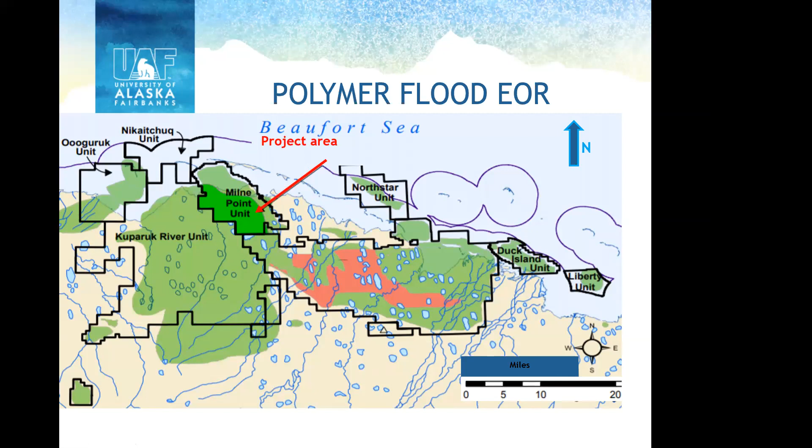I wanted to just get a little bit into the polymer flood project. This is a $10+ million project that we're working on with primarily Hilcorp, and it's funded by the Department of Energy. The location of it is the Milne Point unit, which is about 30 miles to the northwest of Prudhoe Bay. It was a 50-50 split between Hilcorp and BP, and now, of course, it's all Hilcorp owned. And they have been fabulous partners to work with.

I'll get a little bit into the polymer itself in just a second, but basically how this works is the polymer is manufactured in the Gulf Coast area of the United States as a powder. It's shipped up to Alaska, as you might guess, at great expense. It is then mixed with water until you get a certain viscosity, and then it's injected into the injection wells. There's not a lot of infrastructure to make it work and to make it happen.

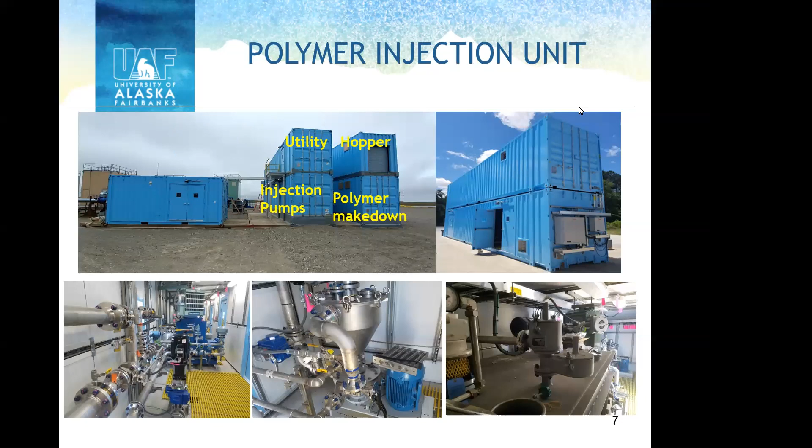So for those of you that really aren't familiar with oil field operations, you have an injection well, and then some distance away you have a production well where the oil and fluids come out. In the injection wells, you're usually placing a gas, a miscible injectant, water, and you're pushing that oil away from the injection well and towards the production well. Typically, since we can only use non-thermal means on the North Slope, we use a lot of water up there.

And again, going back to your pancake syrup, when you have that plate, especially with a little kid with lots of pancake syrup left over, and you run water across that plate in your sink, you see those little channels of water, those little fingers of water that get through, they break through those areas, and then maybe another finger breaks through someplace else. And then over time, it comes back and gets all that viscous product from between them.

So you can imagine in an oil field operation, if you're putting this water under a lot of pressure in there and you get a finger that pokes all the way through to the production well, you're getting an awful lot of produced water relative to the amount of oil that you're getting.

So with the polymer flood, that kind of takes away this fingering attribute, and it's more like putting a snow blade on the front of that water blade. So now it's just a whole lot more efficient at pushing the oil towards the production well. So that's one of the reasons that you would use polymer.

Nobody's ever used this before in a heavy oil production, with a few exceptions, I think in Russia and maybe in Canada.

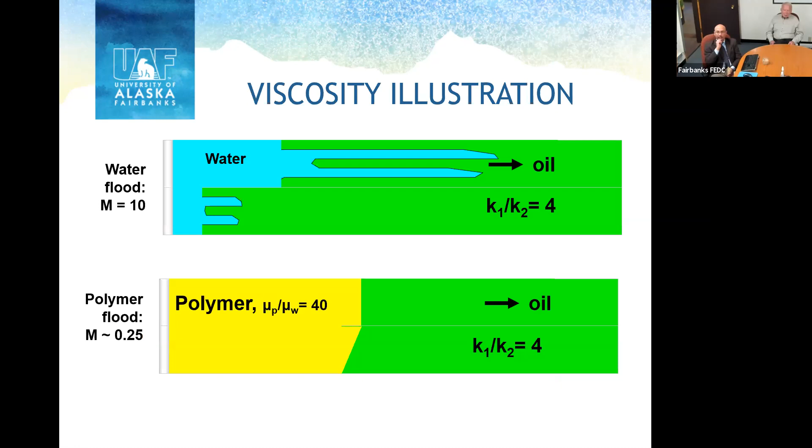You can't use the hot water or steam because your injection well is going through 3,000 feet of permafrost. And permafrost doesn't have any mechanical strength in and of itself. And if you start to melt it, it turns into like tapioca pudding. And the well essentially separates from the surrounding permafrost.

And the weight, you can imagine a 3,000 foot vertical straw, the bottom part of that well can't support the weight, and you end up getting that well buckled. It kind of turns into a spring, if you will. There's a deviation, and it just couldn't handle the weight.

The other thing that you could do is, of course, you can insulate around the hot water or steam injection well, but eventually that insulation is going to come to equilibrium with its surroundings. So you're still going to, after X number of years, start to melt the permafrost that's around the well. So insulation isn't going to work.

So that leaves you with some sort of an active cooling mechanism. You'd have a well pumping hot water or steam down, and then you'd have an outside water jacket or a glycol jacket that's for cooling. But you can imagine the amount of energy that that's going to take on the North Slope to have an outside water jacket circulating a cooling fluid through there.

So you're burning a lot of natural gas or using a lot of energy to generate the hot water and the steam, and you're using probably that much or more energy to create that cooling jacket, and then you've got all the pumps and everything that you're running with it. So that's why typically it's just not thought to be a wise idea or even economical to be using hot water.

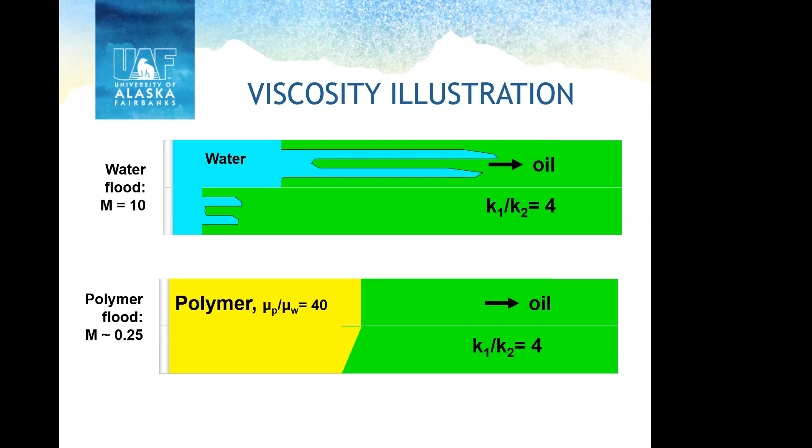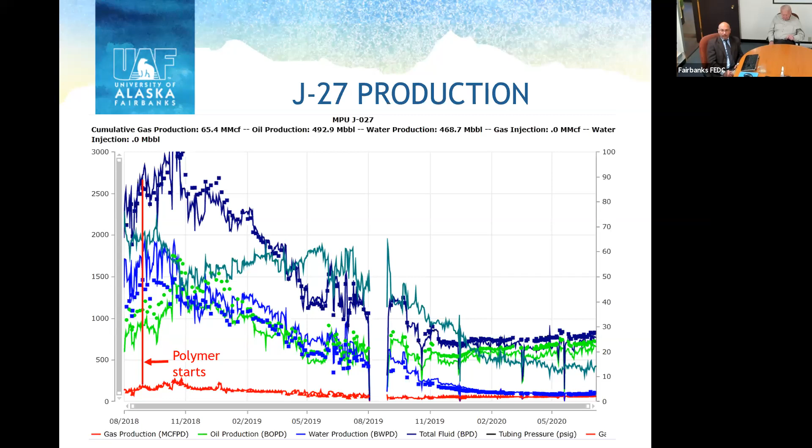Okay. I do have one last question regarding the polymer, and that is, what is the downside, or have we identified any, if the polymer cannot be recovered later? Well, this is the first time polymer has been used in viscous oils. Polymer is widely used in light oils. So we have every confidence that we'll be able to recover it. It's really the test that we're having is what solvents do we need to work on this specific water chemistry that we have.

And then there's just a few other minor things that you got to tweak in the field. For example, if you have to heat the water beyond a certain temperature, I want to say it's like 160 degrees, that polymer will start coating the walls of your heat exchanger, turns it into like a little Teflon pan. So then you start getting that insulation on your heat exchanger, and it becomes less efficient. So those are the sorts of things that we're fine tuning and playing with right now. Okay. Yep.

So this is another North Slope project, carbon capture and utilization for EOR. This one was even started by BP a long time ago. They said, you know, Brent, when we get permission to build the gas pipeline, that tells you how long ago this was, we're going to have to separate out the CO2 from that natural gas. And the general thinking in the oil fields is you put that CO2 down into the oil reservoir. It is an amazing injectant for additional incremental oil production.

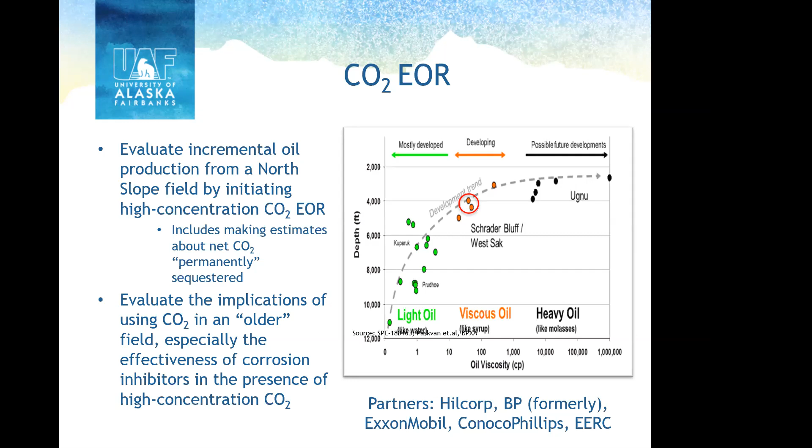And this is really right now at this point an academic study because there is no natural gas sales to the lower 48 at this time. So we don't have the types and the quantities of CO2 that we're talking about to get there. But what we're doing is we're laying the groundwork. We're creating publicly accessible data about what the effect of CO2 usage on the North Slope is going to be.

I think everybody agrees it's a good idea because when you use CO2 for EOR, a good chunk of that CO2 remains behind in the reservoir permanently sequestered. So we're trying to get our arms around, well, how much CO2 is continuing to circulate, how much CO2 is left behind, what are the effects on the fields, what's it going to cost, what's the upside potential, what's the downside risk. Those are the sorts of things that we're looking at.

And we're just, as I said, trying to create a public record. It's an academic exercise of modeling, working very closely with the industry, and we'll see where that path takes us. We'll be doing that for the next 2 or 3 years, funding a number of grad students. And we're working, as I said, very closely with the EERC on that.

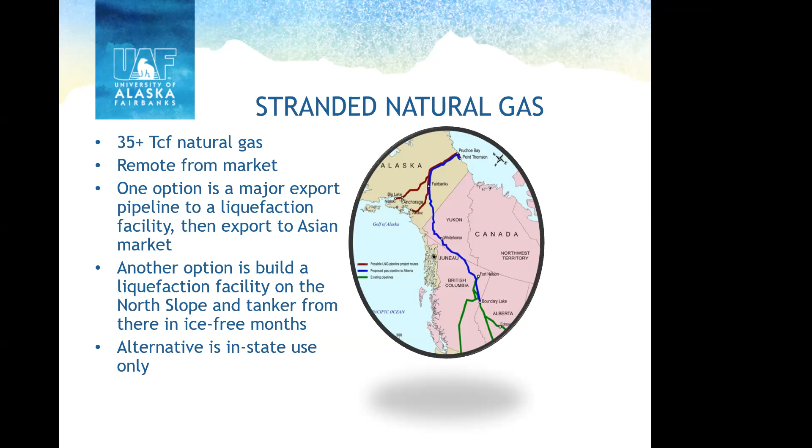Jim will correct me if I don't speak for him as well. But kind of giddy that you're actually looking at this. You know, we looked at a coal, excuse me, biomass to liquids project some years ago. It was going to make, as you would expect, high quantities of pharmaceutical grade CO2, and we wanted to possibly use that on the North Slope, or have it looked at. So we're glad that that's moving forward.

Mm-hmm. Yeah. So he hasn't yelled at me, so I guess I did speak for him.

Let's see. What kind of acids are formed from CO2? I think carbonic acid is one. Is that correct? I mean, that's soda pop.

Yeah, well, yeah, that's the primary one. Again, I don't have my speaker notes up. I don't know what happened to them on the screen. I had a few of those derivatives of what happens when you mix those together. I don't feel comfortable saying from memory because I'm just not technical in that area. So, it's okay, I could take some guesses, but I'd be wrong. And since this is recorded and on YouTube, I got to be careful.

What was Jim going to say? Nothing. He's just throwing me dirty looks.

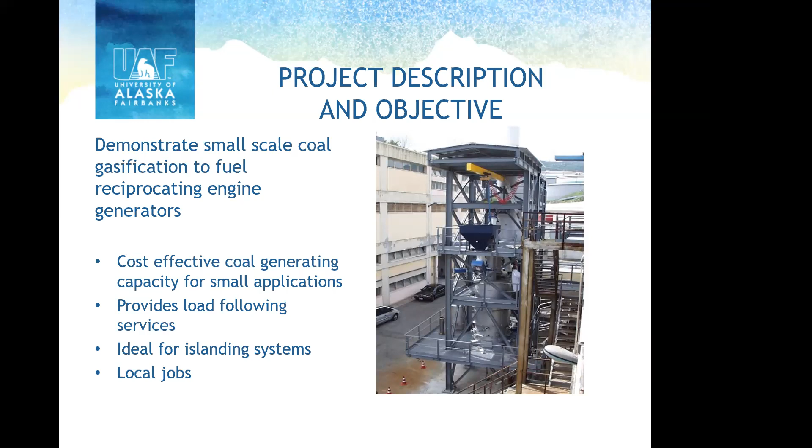Ideal for islanding systems, meaning that we could put it on the military base, for example, and if the Golden Valley grid ever went down or the base had to be separated for some reason, it could still operate. And then it's just good for local jobs. Here's kind of a listing of the equipment. This is what a gasifier looks like. This is a prototype that was designed by HMI and built at the Sotacarbo labs in Italy. Sotacarbo is partnered with us on our project so we can glean all their information from operating that gasifier.

It makes a low BTU syngas, and that low BTU syngas goes into an engine that's designed for low BTU gases, the Jenbacher engine, which was formerly owned by GE. A company called INNIO just bought it here within the last year. You would typically find these Jenbacher machines on landfills where they burn landfill gas. There's like 2 or 3 of them down in Anchorage, as a matter of fact. And there are distributors and support networks here in Alaska. We're very familiar with the Jenbacher.

The other component is that this gasifier makes tars and oils, liquids, if you will. And our plan is to blend those tars and oil liquids with ultra-low sulfur diesel or equivalent, and then burn in a diesel engine. This was the university's Pielstick 9.5 megawatt engine, but about 2 weeks ago we decided to not use the university's engine, and we're going to put a Wärtsilä in there instead. I'll have to update my spreadsheets.

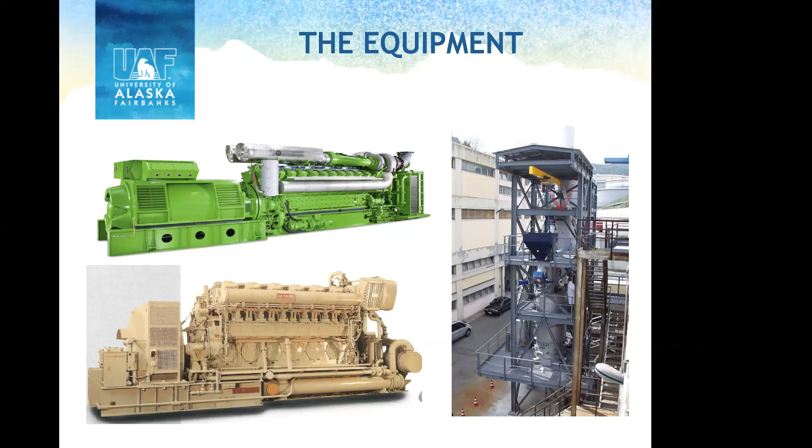So this is just kind of a little bit of a walkthrough so that you can better visualize what we're trying to do. So coal goes into the gasifier, a synthetic gas comes out and it gets cleaned up in a cyclone. Then it goes through a cooler, because if you send the hot gases into our ESP, electrostatic precipitator, you burn it up. So it goes through a cooling phase.

Then that syngas goes through the wet electrostatic precipitator, and that's essentially where all the tars and oils mixed with some water drop out. And we're working with companies right now to separate the tars and oils from that water and to clean up the water for reuse. Our plan is actually to use it as irrigation for 10 acres of greenhouses.

Then that gas gets cleaned up to take out any of the other remaining nasties, including all the sulfurs, and it goes into the Jenbacher engines where it makes electricity and heat. What I didn't put on this chart is then you have a stream here, blends with the diesel, and goes to the diesel generators. Our hope is that Golden Valley will work with us and use the diesel generators for their wind regulation.

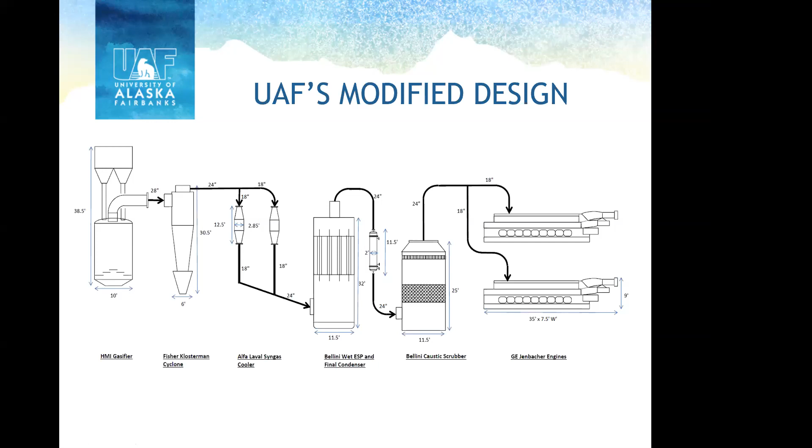So the DOE goals are that they want small units, and what I laugh at is they define small as 50 to 350 megawatts. Our project is 18 megawatts, and we actually have 3 different options. That's the largest of our options. Ultimately, we want to modularize this system. We want to get it up. We want to develop the technology. We want to prove it.

Then we want to be able to put it on skids, build them in some central manufactured area, ship them out to villages where they might be able to use them with the existing diesel infrastructure that's there, ship them to third world countries where they might need more reliable power, or even ship them to the lower 48 for a few applications there.

We're building this in a serious non-attainment area for PM 2.5, and even with throwing all the bells and emission controls, everything at it, in our market, it still should be economical. Our models are all showing that even meeting all the stringent PM 2.5, we can generate electricity for about 10 cents a kilowatt hour, which is expensive for the lower 48, but for up here, that's a pretty good price.

Of course, we're going to clean up the water. Our goal is for greenhouse use irrigation. Capable of natural gas co-firing, so if our syngas unit ever goes out or the project just goes belly up, those Jenbachers can be repurposed and used anywhere. They'll fire on natural gas as well as on syngas. Capable of high ramp rates, so we can use them for wind regulation if that becomes an option, and then of course it generates all those tars.

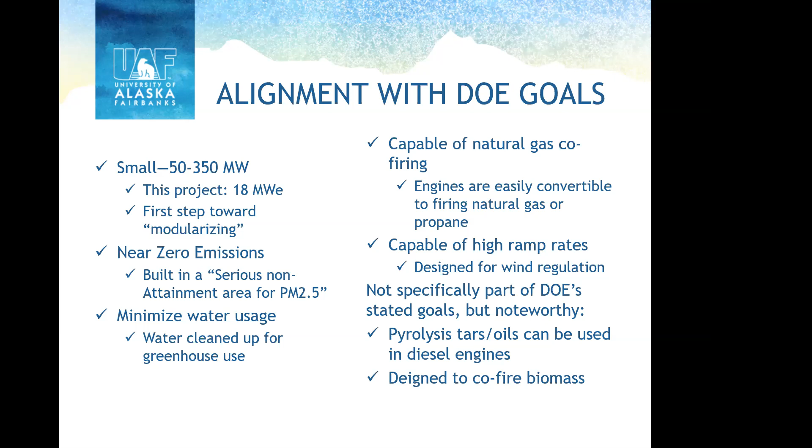Originally, this project was going to be at the university. We spent about $1.5 million redesigning the Atkinson plant to take it. Then there was a change in management there, and they said, we don't like your toys in our facility, move on. So much to the chagrin of DOE, after spending $1.5 million, we had to find a new place. So we started looking at co-locating it with Healy 1 and Healy 2.

Got about 2 weeks down the road on that, and then there were a lot of management changes at Golden Valley, and the new management would prefer that we moved on elsewhere because this wasn't consistent with Golden Valley's board. I believe their strategy for meeting their CO2 reduction target is to reduce the amount of coal. I think there's other ways they could do it, but in the minds of some of the folks there, CO2 reduction is synonymous with reducing coal. So they asked us to find a new place.

We looked at a few places in North Pole, and we ended up, because of our time constraints and because he's got everything we need, being on the site of Chena Power, where we have rail access, we have a three-phase power line directly into the Golden Valley system. We have room to build 10 acres of greenhouses.

And I think FEDC did a number of studies years ago on the need for local food production and greenhouse production. And I only know that because I used a lot of those reports as research for this project. So kudos to FEDC for forward thinking.

Again, for this particular option, we're looking at... is there a question? There are several comments in the comment box, but why don't you continue?

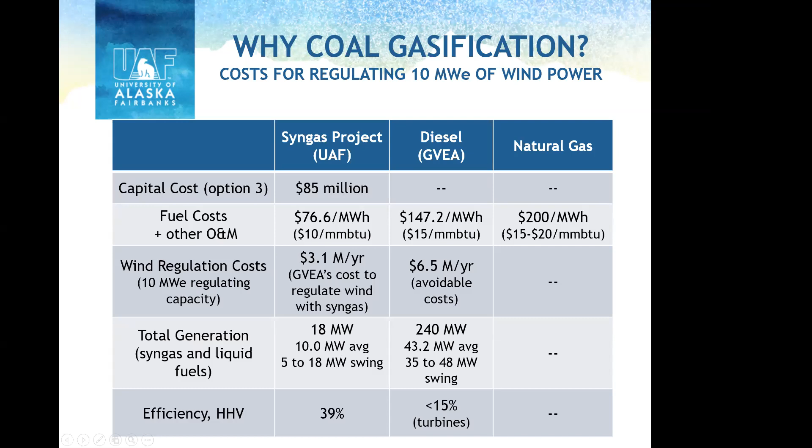So this is the biggest challenge we face, is getting this permitted in the Fairbanks Serious Non-Attainment Area. So those are some of the hurdles that we've identified. I actually have another meeting at 10 o'clock today to kind of get updates on all that. Why are we doing this? Well, for one thing, it lowers the cost to interior ratepayers. But our goal, remember, is to make this really small and modularize it.

There's 37 villages sitting on top of coal, and those that don't even have coal, they're on the river systems for the most part, and they're already receiving diesel by barge. I make the argument that coal is actually the environmentally friendly choice for these villages, because most of these villages are reliant on those rivers for their food source, their fish and everything else.

If you have an oil spill in those rivers, or if one of the tanks that they store near the river should spring a leak, you have irreparable damage. I shouldn't say irreparable, but it'll take the rivers a lot of time to recover. If you have coal and it sinks, the fish swim out of the way, right? So there's a lot of opportunities.

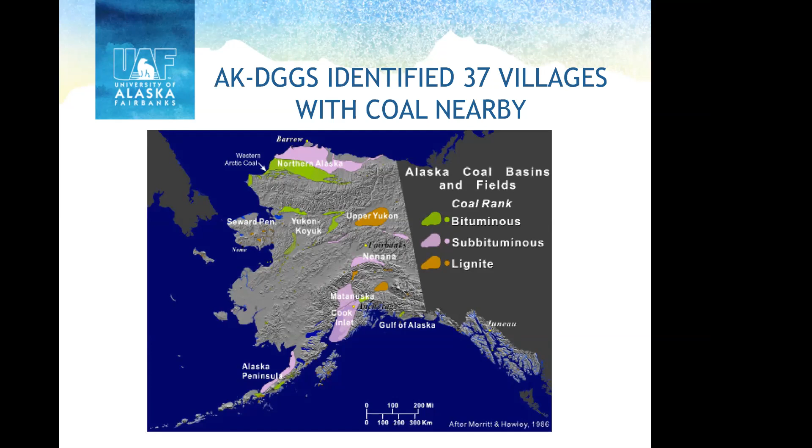And if you are also developing the coal in your villages, that's jobs in your villages. You're not sending that money to some refinery in Seattle. Now, can it work? I mean, at 18 megawatts, we're still looking at 10 cents a kilowatt hour. Now that's expensive for the lower 48.

That's reasonable for Fairbanks. That's a bargain for the villages, but we can't really make it work at 2 megawatts yet. There's just too much capital involved. There's a whole lot there. So our goal is to view this as a research facility. We want to work towards getting it down to a village scale.

We also want it to be really easy to integrate with the diesel infrastructure that's there. Most diesel engines, you just put another nozzle on them if they're newer and start burning natural gas. You don't have to burn diesel fuel in them. And then even if you do have to, we've got the liquids and tars that could be heating oil in homes or whatever. Could be blended with diesel, so it stretches your diesel. There's a lot of uses for this.

But like I said before, we're not ready for prime time with that. This is an ongoing research project. So really what we're building is a demonstration project that's going to be a research facility. And ultimately, we want to get it where we can use biomass, and we want to ultimately get where we don't even have a smokestack.

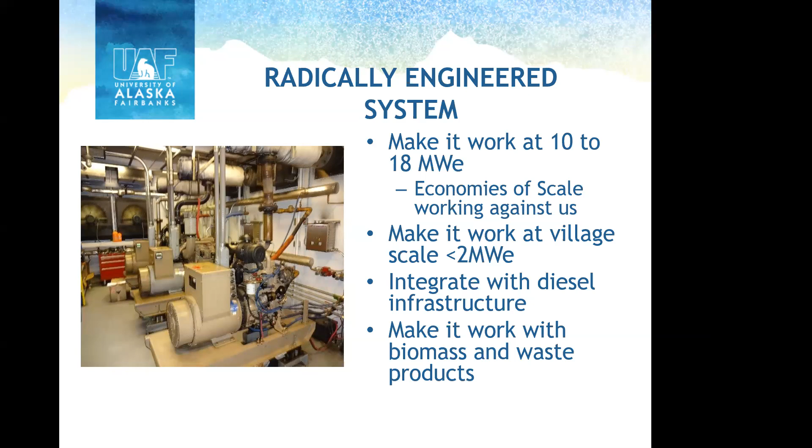Another reason that the DOE picked up on and why they funded this project is it's useful in the lower 48 too. There's a bunch of aging coal-fired plants down in the lower 48 that are on their last legs. They're getting their butts beat by natural gas because there's more renewable energy going onto the grid system, intermittent resources. Just look at California. The sun goes down, the solar goes away, the wind blows some days, it doesn't blow the others. Natural gas is available 24/7 to sort of fill that void.

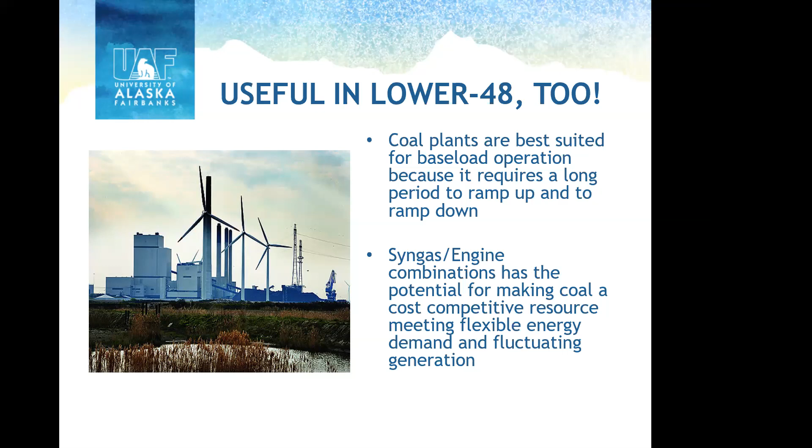It's there. Coal plants are just too big and cumbersome. They can't ramp up and down like the gas plants. But you take a system like the one we're designing, which is small and it is able to ramp up and down, and you put it at the interface of that coal plant with the grid, then a plant like ours takes all those hits from the intermittent up and down. They follow that wind regulation, while those big coal plants behind can take their time moving up and moving down. So we've got, I think, tremendous market potential once we get this technology developed.

Now, except for the HMI gasifier, all the components that we're using are available commercially. They're generally skid mounted already. All we're doing is a new application and a new way to do it. And even the HMI gasifier is pretty well understood. There were some projects as a result of the Arab oil embargo in the 70s, and I'm old enough I remember some of that. So I actually got in contact with one of the guys that ran one of the gasification projects from the 70s. So that's the technology we're using now.

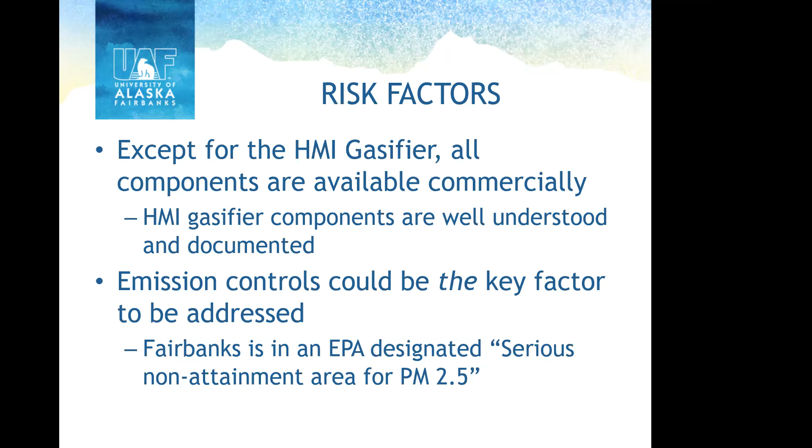It's based on the Wellman-Galusha design. Doesn't mean anything to you guys, but there's 80 years of history running those things in steel mills and every place else. We're just modernizing it, instrumenting the heck out of it, bringing it up to modern times and modern performance standards. And emissions is going to be the key factor. NETL has come right alongside. They're excited by this. They're spending their own money to model this system. We understand its performance in the bed, the coal bed, that is. That didn't come out very well. Anyway, there's a lot of excitement around the industry for this.

The main thing is, can we meet all of our deadlines? I think if we meet our deadlines, this is going to be a very competitive project, and you're going to see a big investment in Alaska from the Department of Energy on that. Because of time, I'm going to stop there, but we're working with DGGS and a few others to put together a plan to go after another 50 million or so to start examining Alaska's potential for rare earth elements.

And I'm going to stop talking, but I'll leave this screen up because I just want to point out that the blue lines here are all the rare earth elements that Alaska has the potential for. The green is the rare earth elements that Alaska used to produce but doesn't, except for one that's ramping up. So that's a lot. I'm going to stop there.

That's great. Okay, so we had a few comments regarding the gasification project. And again, I'll start with just Jim and I here at FEDC, just the fact that we're thrilled that you're getting this to the actual demonstration phase. Again, we did the original Hatch report, gotta be over a decade now. But we saw real potential in it, and so we're just thrilled that you're being able to move this forward. On an aside though, we're not to the actual demonstration phase yet. We gotta win that phase 3. You're getting further than we did, buddy. And we're thrilled.

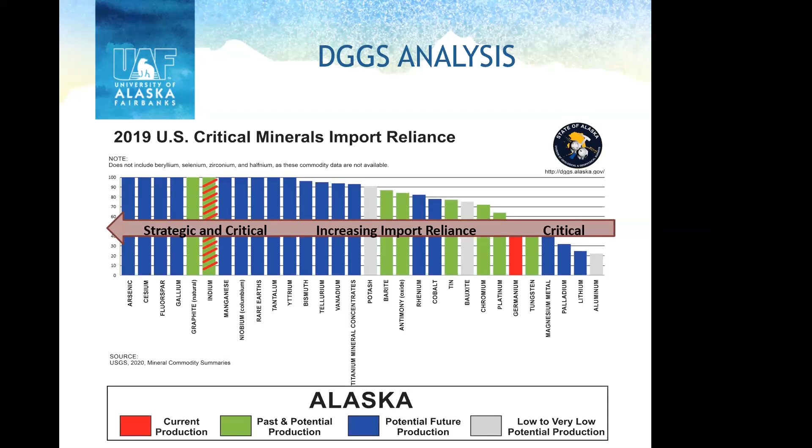Keep us apprised of anything that you need help with, if we could rally support, especially also this greenhouse project. That's very exciting. So whatever you need, keep us apprised. Thanks. I think you should keep this presentation handy. Brent, I feel like the university may be calling on you for one of the legislative hearings to remind them of all the good work going on at the university and that incredible return on investment.